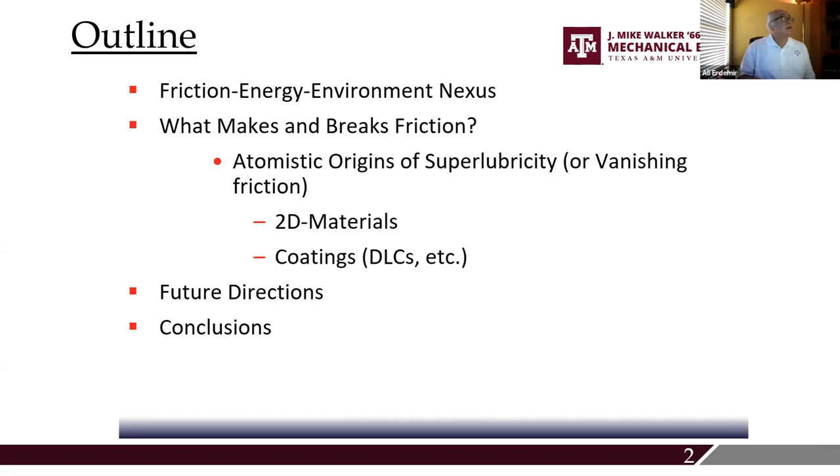So friction, as you all know, is known as resistance to sliding. And we feel it, actually, we live with friction every day. We hardly make a big deal about it, but it's part of our daily life. Despite being part of our life, it is one of the least understood physical phenomena.

We are doing all we can with all these computational capabilities to understand the root causes of friction at the atomistic level, and we are making progress. But have we actually fully understood it? I doubt so. So it's going to be with us for quite a while longer.

And it is very important for safety, safe walking. A few weeks ago, we had a big snowstorm here down in Texas, and it crippled life, and everything almost came to a halt, and it caused major damage. People fell down and actually fractured their legs. I have a friend at the university who actually had a major surgery because of a fractured hip. So it's due to friction, or lack of it.

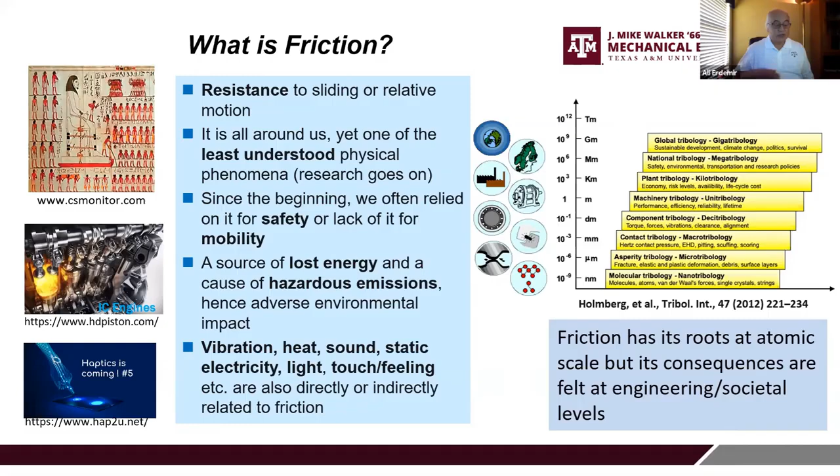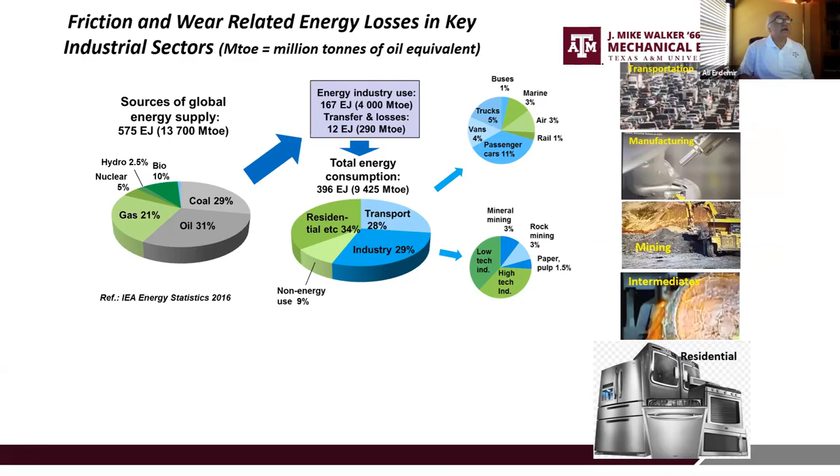If you go to the next slide, you will see that worldwide we produce a huge amount of energy. We need it for our industrial activities and modern lifestyle. There are so many of them. And in every one of these, there are a lot of moving parts, as you can imagine.

Some of these industrial activities shown down here show the fact that there are a lot of moving parts, and in every one of these, there are frictional interfaces where energy is dissipated.

With Professor Holmberg from VTT Finland, we tried to estimate how much energy is lost to friction in all these industrial activities. And it turns out that if you combine the portion that is due to wear and material loss, friction and wear almost consume a quarter of the global energy output. And this is quite incredible.

Collectively, these two events actually also produce 8 gigatons of CO2 emissions. I think currently total CO2 emissions are about 44 gigatons or so. So it's almost proportional - it's quite a huge amount of CO2.

And this has been actually going on for a very long time. This accumulates in the upper atmosphere, and then we create these greenhouse gas emissions. And then we have all these weather-related or environmental-related issues.

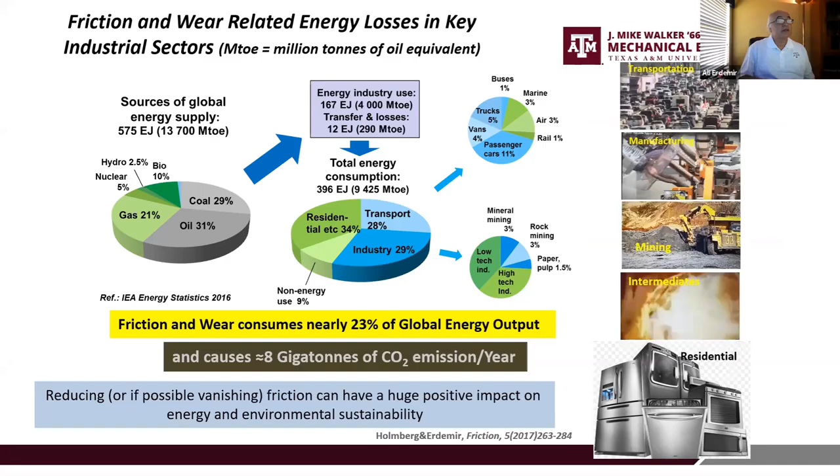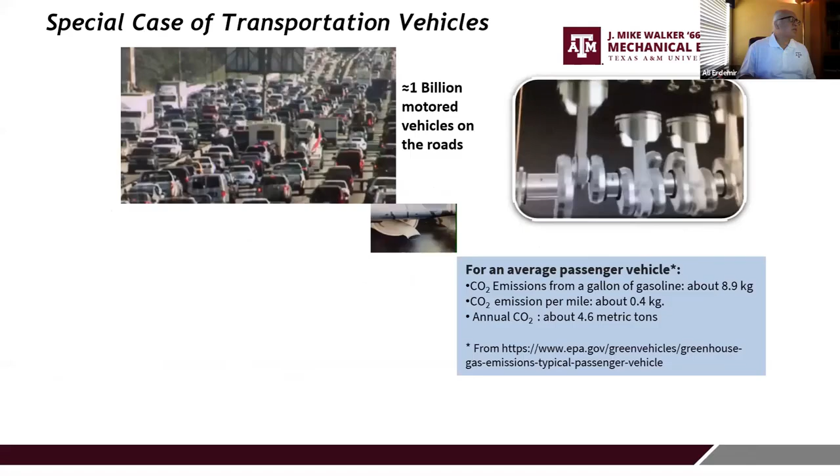There are a lot of good activities for clean energy resources, but these developments unfortunately are at a very slow pace. If we look briefly at the situation with transportation vehicles, especially in this country, we have almost 300 million of these moving on our roads. This way of transportation actually became extremely inefficient, very wasteful in terms of energy.

We did a very focused study with Professor Holmberg to see how much of the total energy that we put into the fuel in our gas tank is actually used to move the car. It turns out that if you take all the thermodynamic losses, air drag, and other things, the bottom line is that only about 20% of the total energy recovered from the fuel is used to move the car. This is really unsustainable.

This had to change. Of course, nowadays there's a huge interest in switching to electric vehicles, and these are coming very strongly. Hopefully by the middle of this century, half of the vehicles on the road will be powered by electric vehicles, and I think that's a great thing.

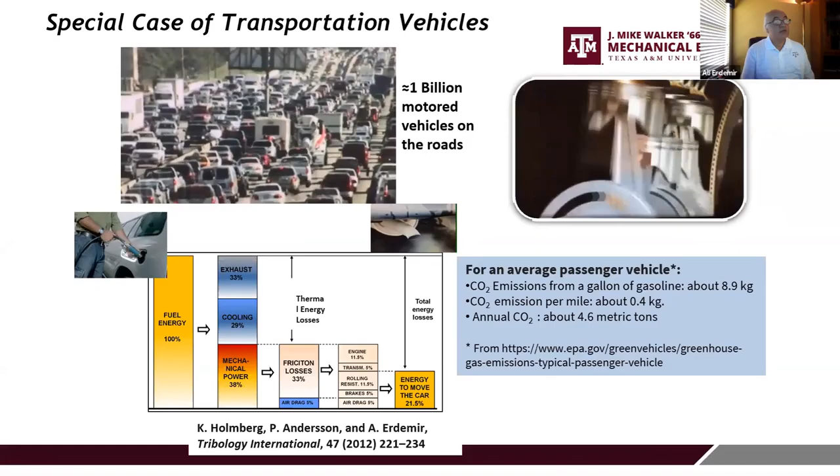In this country, every one of us, according to statistics from the EPA, drives a car, and we are culprits in terms of our carbon footprint. Every one of us produces almost 4.5 tons of CO2 annually. When you think that we have over 1 billion motor vehicles, these are quite unbelievably high numbers. In this country we have a huge number of transportation vehicles, and collectively they are blamed for 28% of greenhouse gas emissions in 2018.

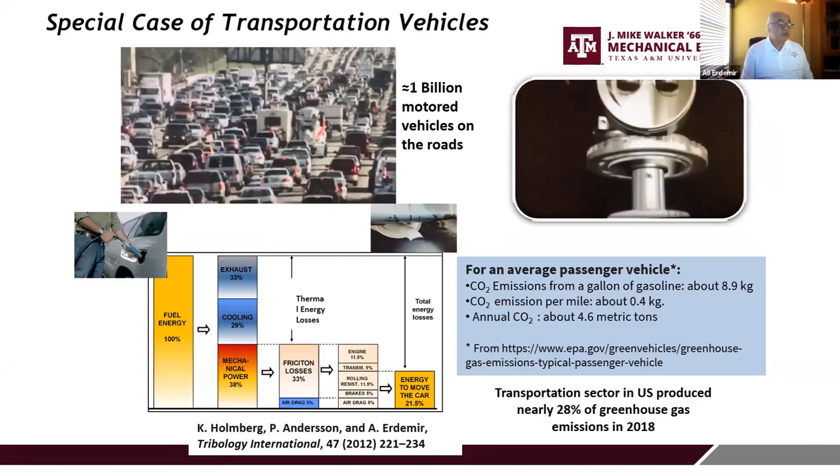As I was saying, these figures are not very good in terms of our future sustainability and future generations, and we have to do something about it.

In terms of their carbon footprint, it may not really be much different. If we still get the power from fossil fuel burning power plants, the situation won't change. The only change is that we are shifting that carbon footprint to another source, as opposed to the cars or vehicles that are currently the main source of these greenhouse gas emissions. It will be shifted to a coal-powered or natural gas-powered power plant. These are the kinds of things we have to be very mindful of.

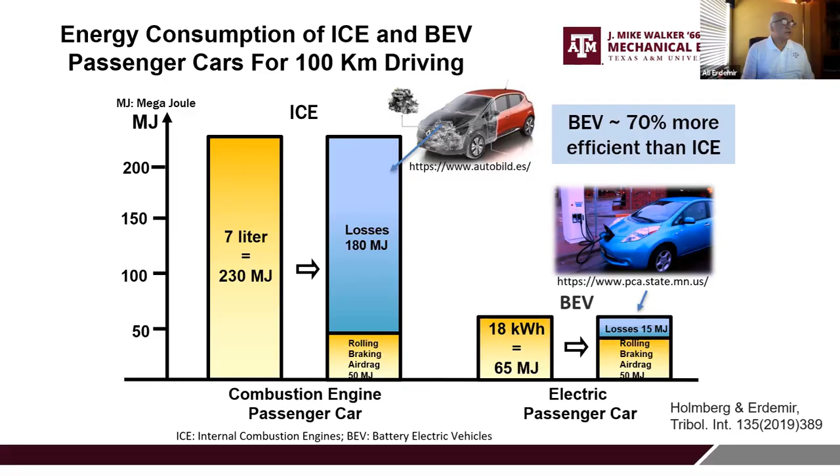So in general, if we can somehow switch to or develop technologies that will reduce friction or reduce frictional losses, that will have a huge impact on the environment, and also in terms of energy security and sustainability.

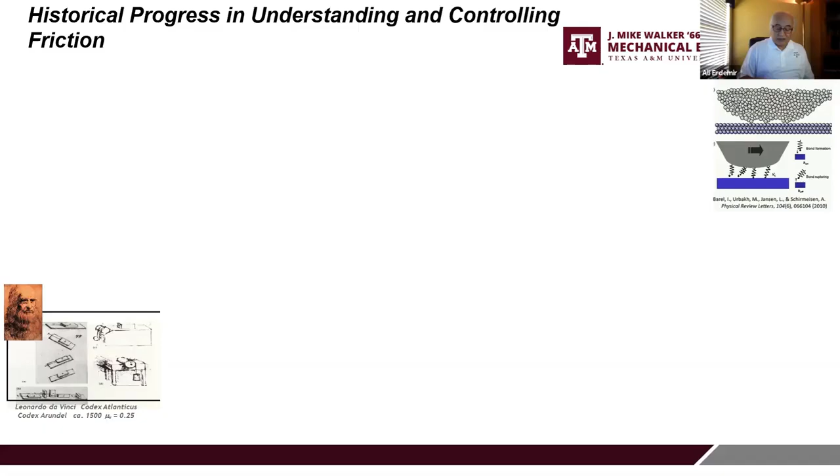Historically, if you look at how friction science and technology evolved over the years, we've come a very long way. The early scientific studies go back to the Middle Ages. Leonardo da Vinci was, of course, the master of these early studies, and he developed some very sound scientific principles that resonate even today. His experiments could be duplicated today, and you would practically get the same results.

But since then, we have made remarkable progress, especially in the beginning of last century, with atomic scale models from Tomlinson and Frenkel, and others who took that foundation further and came up with more realistic models in which the possibility of vanishing friction became possible. Hirano and Sokoloff were specifically two pioneers of these early studies, in which they developed commensurability versus incommensurability states of contact, which make a huge difference in the frictional properties of two contacting surfaces, as I will mention later on.

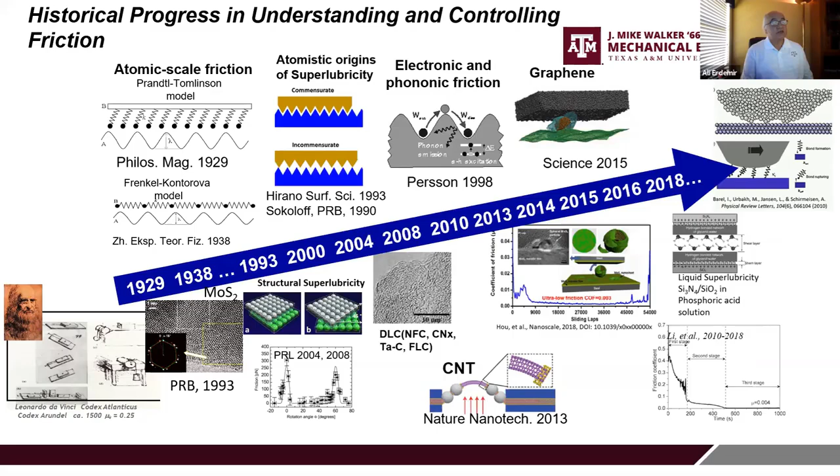Later on, we increased our knowledge further, looking at the electronic and phononic dissipation, or the sources of friction. Based on that understanding, we came up with the latest and greatest materials, especially 2D materials and surface modification technologies, which now make it possible to achieve superlubricity, or nearly zero friction, at the interfaces of some sliding surfaces. This summarizes the progress in superlubricity for solid sliding surfaces.

So it looks like we have really come a long way. We all know that if we rub steel against itself or aluminum against itself, we get very high friction. If we sprinkle some boron nitride or graphite or PTFE or MoS2, friction comes down quite substantially.

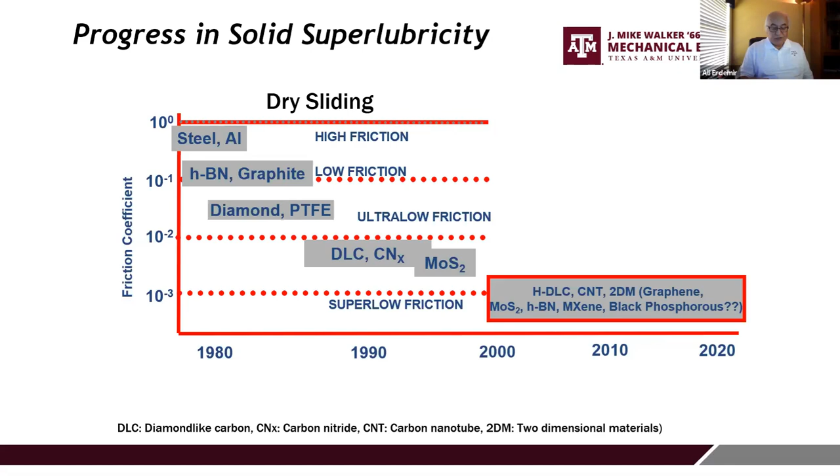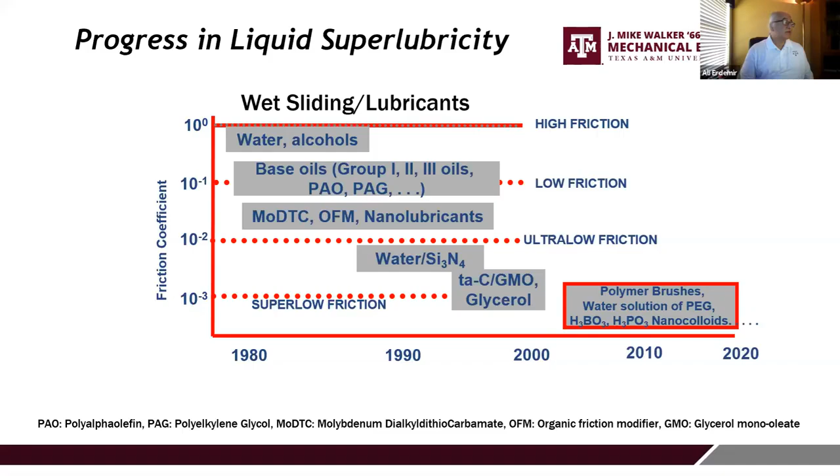And then we have all these other technologies related to polymer brushes, PEG, phosphoric acid, and some nanocolloidal systems, which, when present at sliding interfaces, can also provide extremely low friction coefficients.

So let's look at the case of 2D materials. These started toward the middle of the 2000s, with the discovery of graphene, which made a huge impact in so many ways. One of which, graphene was said to be one of the strongest materials, in fact 200 times stronger than steel. And it turns out it has other properties that have a huge positive impact on its tribological properties.

We were one of the very first to start rubbing and scrubbing graphene, and we published several papers showing that even one monolayer of graphene would provide very long wear life despite very high contact pressure. There was also the possibility of further functionalizing graphene to achieve nearly zero friction.

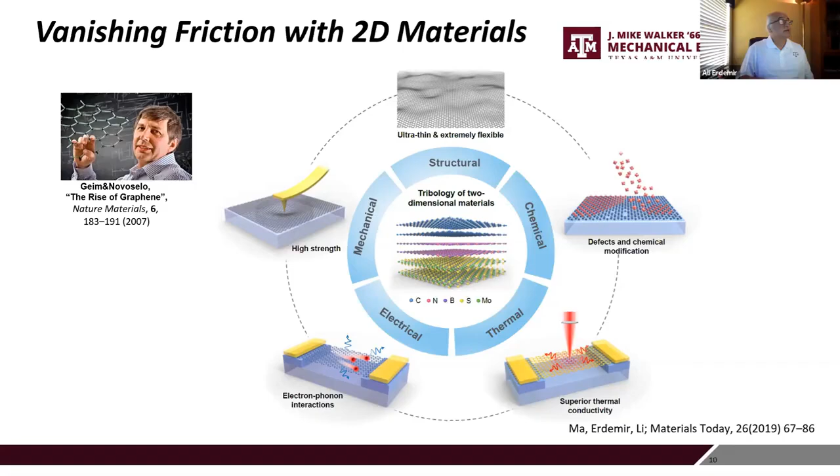We were not the only ones to get these kinds of results. Several other laboratories started working on these things, and under the right conditions, these surfaces could provide extremely low friction coefficients. One of these conditions relates to the commensurate, non-commensurate, or incommensurate state of contact.

In the case of commensurate contact, you have two surfaces, made of the same or similar or dissimilar material, whose atoms on the surface are in full registry. Because of this full registry, you have strong atomic-scale interactions, and thereby what they call atomic locking, which produces huge interfacial adhesion that makes these surfaces move with great difficulty.

In the case of incommensurate state of contact, if these surface atoms are twisted and brought out of full registry, you have a state of incommensurability. This produces weak interatomic potential, and the energy loss and gain between these atoms cancels one another, so in this case you have nearly zero friction.

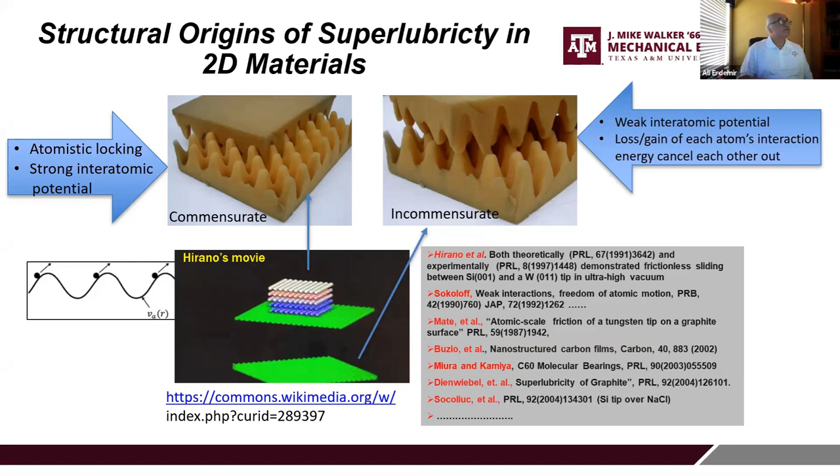One of the earliest verifications of this was from a group of scientists from Netherlands—Dienwiebel and his colleagues—who were able to test this model to see if one can achieve zero friction. They used a nanoscale tribometer, attached a layer of graphite or graphene to the surface of the tip, and rubbed this against another highly oriented pyrolytic graphite at the bottom.

By twisting these two pieces of graphite relative to each other, they were able to see a situation with very huge stick-slip or adhesive interaction. By twisting it slowly, they showed that after reaching a certain twist angle, friction would nearly vanish. This was a very interesting demonstration that commensurate or incommensurate states of contact are very important for superlubricity and having very high friction or no friction at all.

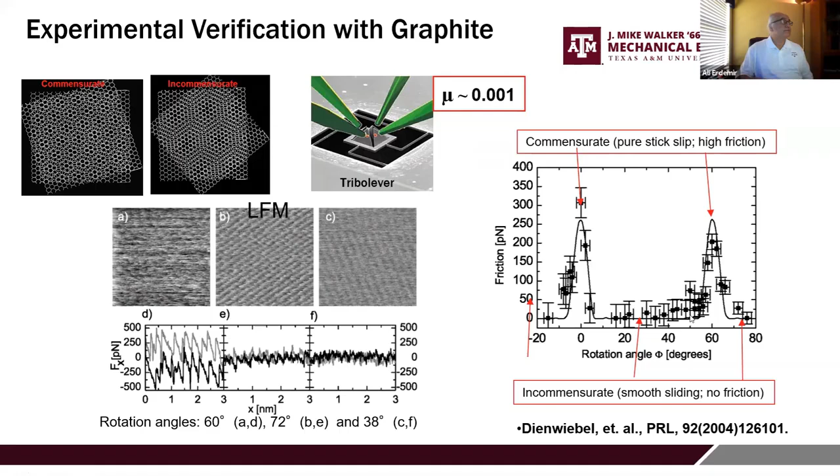This effect was not limited to very conformal surfaces. It could also be achieved with graphene applied to a microsphere and rubbed against either graphene or graphite. You can see the difference in this article: silicon dioxide microsphere against highly pyrolytic graphite shows that with increasing load, you also get very high frictional force.

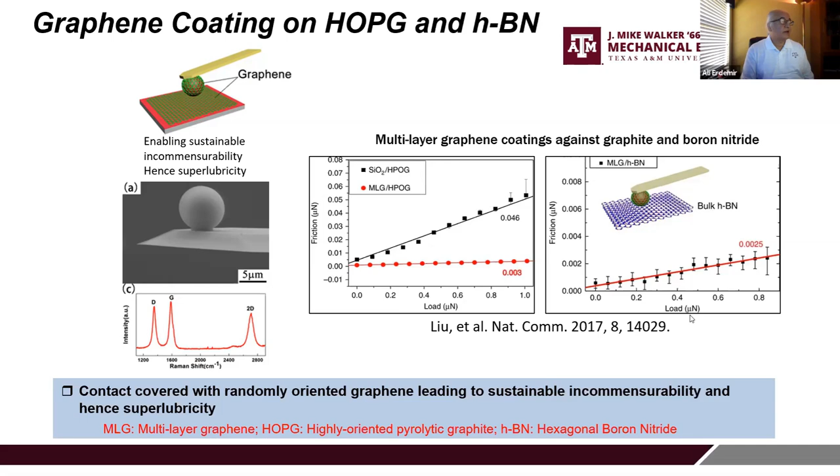But if you have graphene coating on the microsphere, rubbing against the same kind of graphite surface, the friction almost vanishes. Doing the same experiments against hexagonal boron nitride also showed extremely low friction. These microspheres favor incommensurability, so you have only a few direct atom-to-atom registry or commensurate states, and thereby this favorable incommensurate state of contact results in extremely low friction coefficient.

We have done a lot of studies in this area, with Diana Berman, now at the University of North Texas, and my colleague Ani Sumant, still at Argonne. We have seen extreme wear resistance of graphene, and these graphenes could be produced using the CVD method.

Even one layer of graphene under reasonably high contact pressure could achieve over 6,000 sliding cycles of lifetime. If you build a few additional layers, that wear life would go all the way up to almost 50,000 cycles, which was quite remarkable.

Of course, these had to be done in a special environment—in this case, a hydrogen environment. Hydrogen seems to make the broken surfaces of graphene, under sliding contact, eventually wear through or fracture the graphene cage. But these broken edges are stabilized or neutralized by hydrogen, so they don't further disintegrate or participate in this stick-slip behavior that triggers not only very high friction, but also high wear.

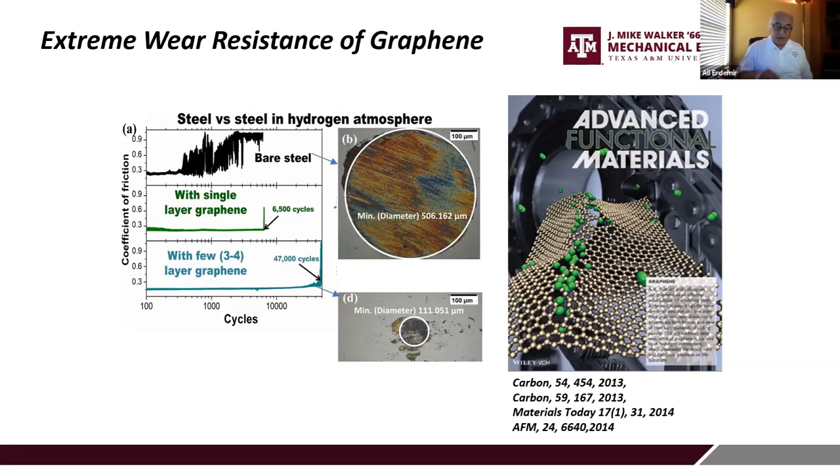In further studies, we have also seen that one can achieve superlubricity with graphene. These were discrete flakes of graphene sprinkled on a surface, combined with nanodiamond particles, typically 3 to 5 nanometers, rubbed against a DLC-coated ball. So we had carbon material in different forms—solid carbon on the ball side, plus graphene and nanodiamond. These combined carbon structures were able to bring the friction coefficient down to the 0.004 level.

When we did very high resolution transmission electron microscopy of these surfaces, we noticed scroll-like formations with diamond nanoparticles right in the center. This gave us the impression that these nanoflakes had been attaching to the surface of the nanodiamond, which makes perfect sense—both the edges and the surface of the nanodiamond have dangling bonds, or covalent bonding possibilities. Once that happens, the rest of the graphene would just scroll to form these rolls.

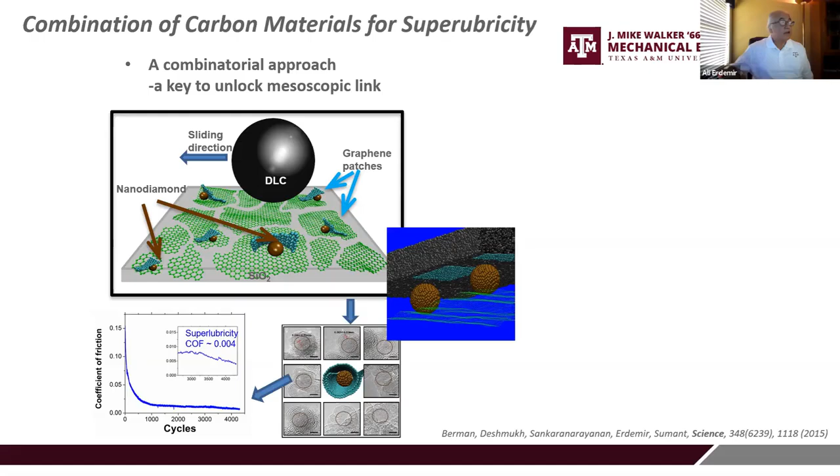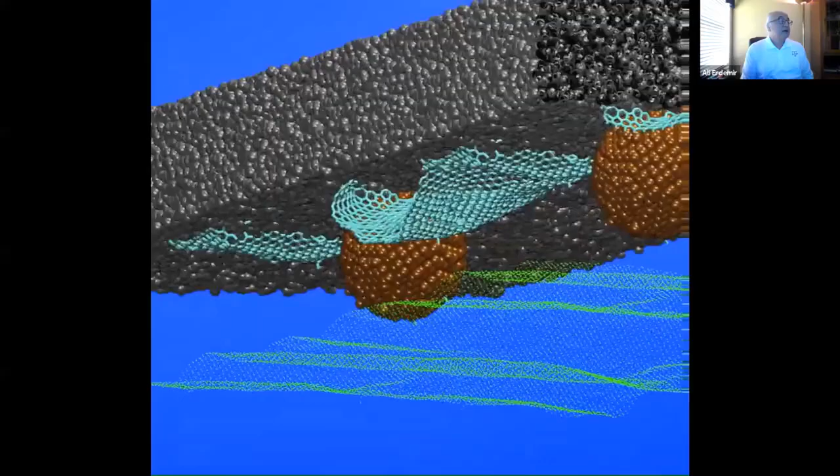This was also simulated using reactive MD simulation methods that show exactly how these nanoscrolls form. Once the nanoscroll forms, the severity of the nanodiamond as an abrasive and adhesive particle is diminished, so it becomes more benign, and it can also roll, in addition to having this surface-to-surface interaction—what we call an incommensurate state of contact.

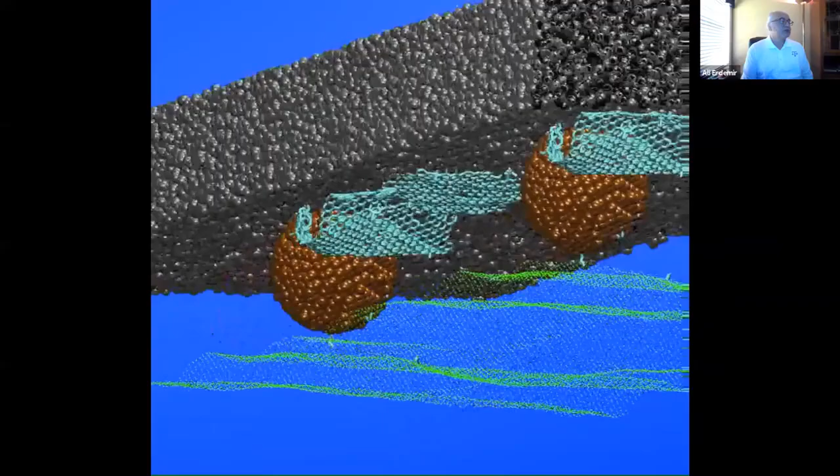There have been many other studies that attest to the importance of structural superlubricity in one form or another. Graphene has been studied quite extensively, and other colleagues have looked at MoS2 and other 2D materials, and so on. It was also found that even in nanotubes, a similar effect could be achieved by twisting the inner and outer shells of the tube, bringing them to non-commensurate states of contact.

There have been some other exciting developments quite recently, one relating to MXene, another 2D material, still emerging. There seems to be a lot of potential for industrial applications in the near future. These can be functionalized by polar molecules or additives and added to a lubricant, and in that case too, you can achieve extremely low friction coefficient. This sounds very exciting in terms of large-scale industrial applications in the near future.

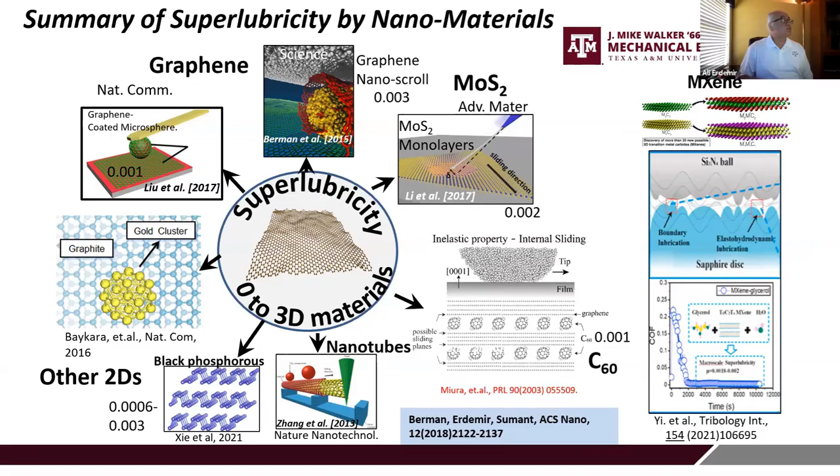Another class of material that shows superlubricity is diamond-like carbon. Diamond-like carbons actually come in different forms, and by and large they are amorphous in nature.

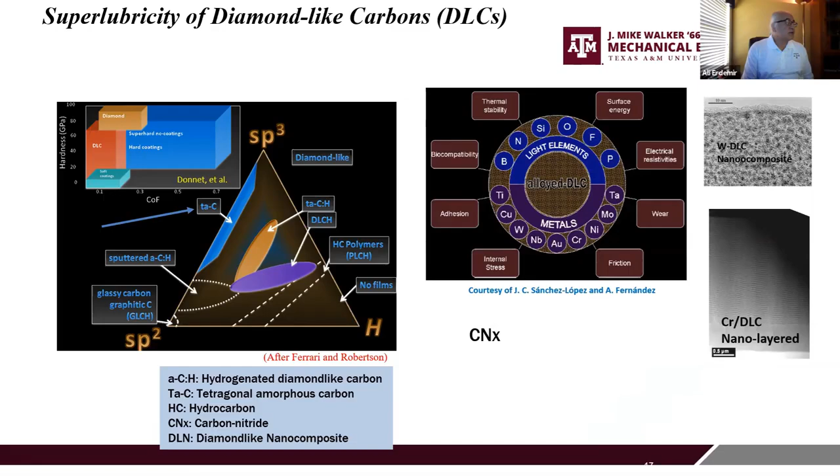Depending on structure and chemical state, they could have, as shown in this diagram, no hydrogen and mostly sp3 bonded carbon, or hydrogen incorporated into the structure. So they come in all kinds of chemistries and structural order. You can have diamond-like carbon with extremely sp3 bonded character, almost similar to diamond in terms of friction and wear properties. Or you can have mostly sp2 bonded carbon, which will be similar to graphite.

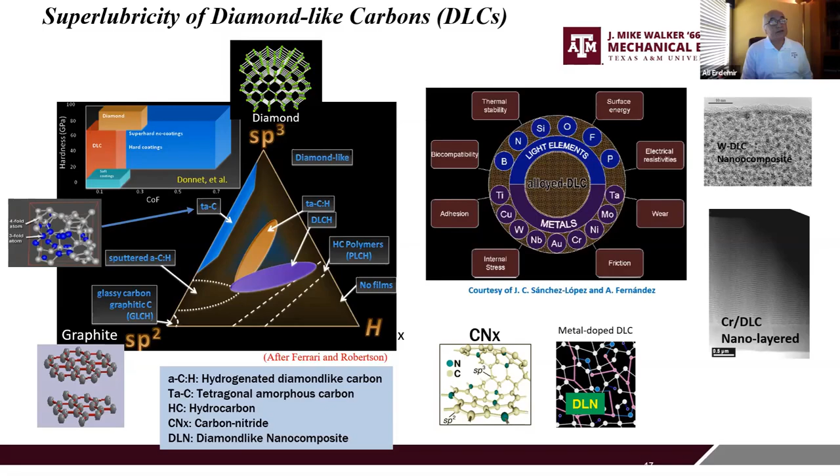You can add hydrogen, and these are mostly produced in a hydrogen-containing plasma environment where hydrogen incorporates into the structure, giving hydrogenated carbon variations. You can also dope other metals and elements into these DLCs to achieve other physical and mechanical properties. CNx is a very important DLC film, and metal-doped DLCs are also important industrially. Tungsten DLC (WC DLC) is widely used in industrial applications, and you can also build these DLCs at nano-layer architectures.

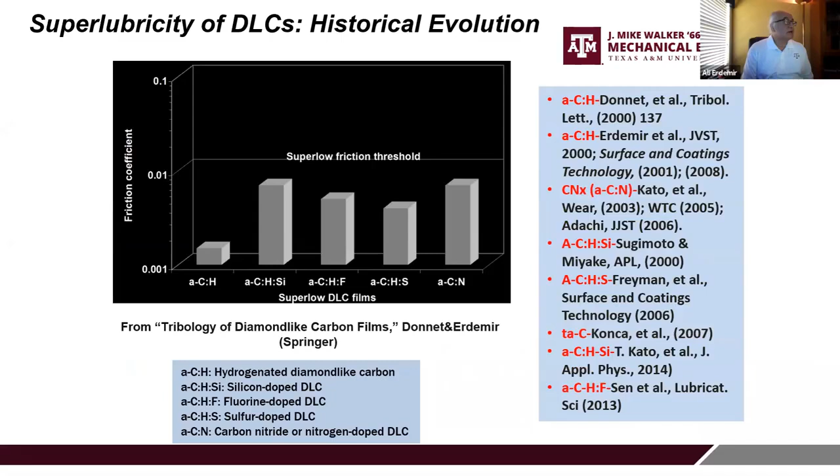From a superlubricity point of view, there have been many studies showing that with different types of alloying or doping, you can achieve superlubricity, or friction coefficients less than 0.01.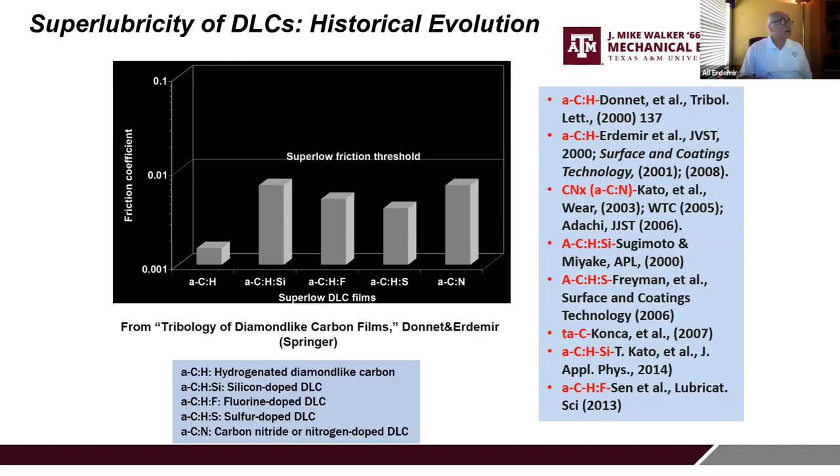In our studies, we concentrated mostly on amorphous hydrogenated carbon, shown on the left side of this diagram. Other colleagues looked at CNX, silicon-doped DLCs, fluorinated DLCs, and even sulfur could be incorporated. In most of these cases, when friction studies were done, the friction turned out to be extremely low.

We started our studies toward the end of the 80s, and published one of the very first papers on DLC back in 1990. What we did was find a very unique correlation between the amount of hydrogen we put into the DLC versus its friction coefficient.

We further optimized this to achieve a unique chemical composition resulting from 25% methane and 75% hydrogen in the plasma environment. The DLC film grown in this kind of plasma environment gave a friction coefficient down to the 0.001 level. This was quite remarkable.

We could actually measure this one test after another. Not only that, but we shared these films with colleagues from other laboratories to see if they could duplicate our results, and they all did. This was quite remarkable.

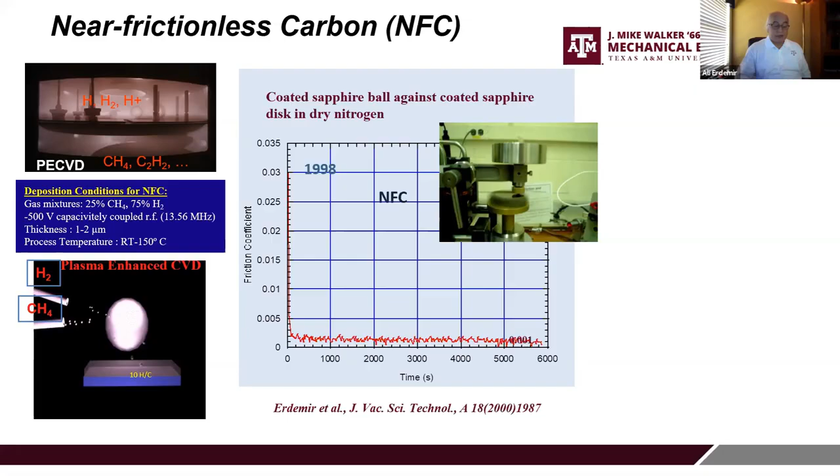If you look at this from a high school chemistry level, when hydrogen loses its single electron to carbon, the nucleus becomes positively charged. So when you bring these two surfaces together, it feels like pressing two positively charged surfaces against one another, which triggers repulsive forces. Otherwise, these surfaces would develop adhesive forces, which would trigger high friction. Here, instead, you're triggering high repulsive forces.

We did collaborative studies with several colleagues who looked into this using ab initio calculations and DFT, among other methods. In one case, they used diamond as a model system since it's easy to simulate.

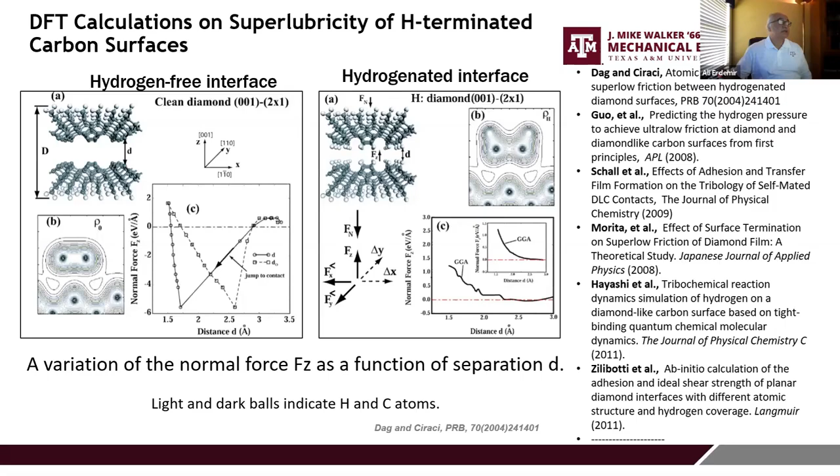So this kind of corroborated as to what made these highly hydrogenated carbon surfaces super lubricious, providing nearly frictionless sliding conditions. And of course, we did TOF-SIMS analysis of these surfaces after the test. The only thing we could see within the sliding wear track was carbon and hydrogen, as shown in these 3D TOF-SIMS maps.

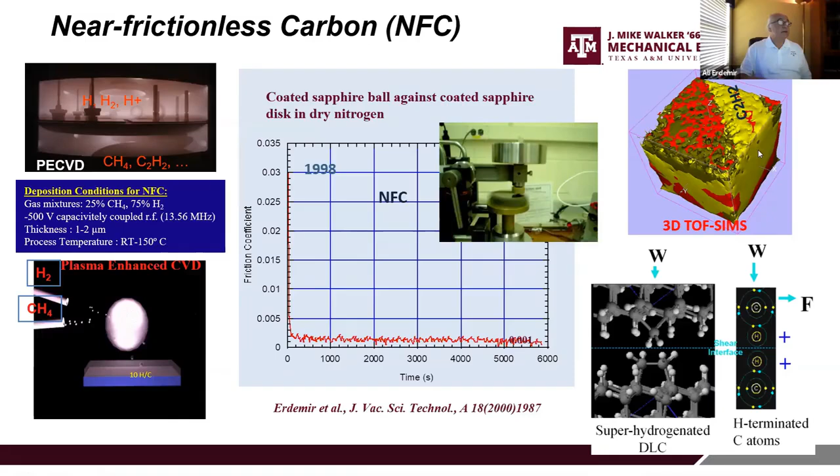So to further prove our point, we started with a hydrogen-free DLC. Actually, these are the kind of DLCs you can directly sputter out of a carbon target in the absence of hydrogen. These are mostly sp2 or sp3 bonded carbon, but on the surface you may have some adsorbed species, and that's about it.

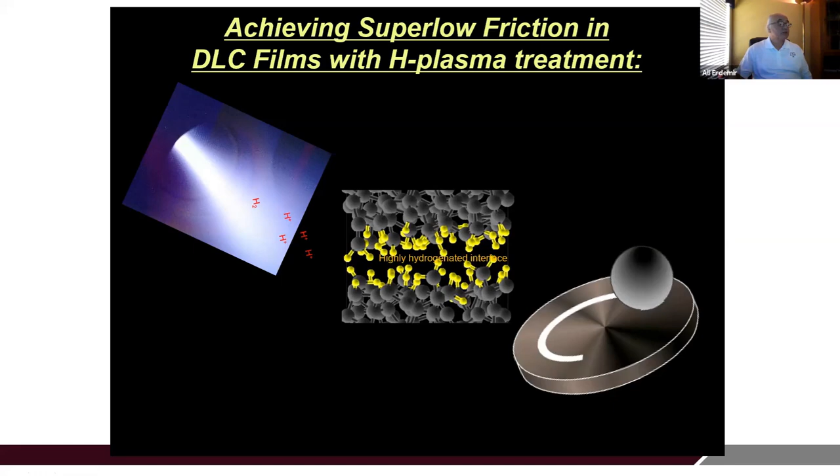Using an ion bombardment technique with ionized hydrogen atoms, we bombarded these hydrogen-free carbon surfaces. We felt that if we could do this, these artificially hydrogenated carbon surfaces should also give superlubricity. So we did the experiment, and it was no surprise that the hydrogen-free or non-hydrogenated surface would fail after about 5 to 10 meters, with very high friction, typically going all the way up to

0.85 and higher. But after the surface was fully hydrogenated through this hydrogen treatment or bombardment, it started giving this extremely low friction coefficient, as shown in the blue curve. In fact, we could measure the friction coefficient down to 0.005. So the hydrogen termination of these carbon surfaces or DLCs turned out to be a very important mechanism to achieve superlubricity.

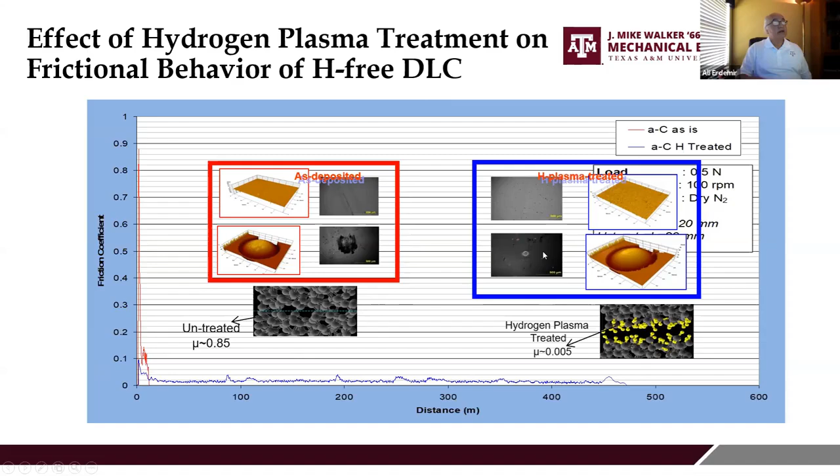And of course, this also reflected very well on the wear of these materials. In the case of non-hydrogenated surfaces, the DLC film was worn out very quickly. In the other case, the plasma hydrogen-treated surface, you could hardly see where the sliding had taken place. So extremely low friction coefficient also resulted in almost zero wear.

Similar things could be achieved with these highly polar oil additives. One is oleic acid, a highly polar molecule. If you put it with a base oil on the surface of the DLC, either hydrogenated or hydrogen-free, these molecules tend to attach to the surface. With that attachment, the surface again terminates with something more benign and less chemically active, and with that you could achieve extremely low friction coefficient, as shown in the red curve at the bottom.

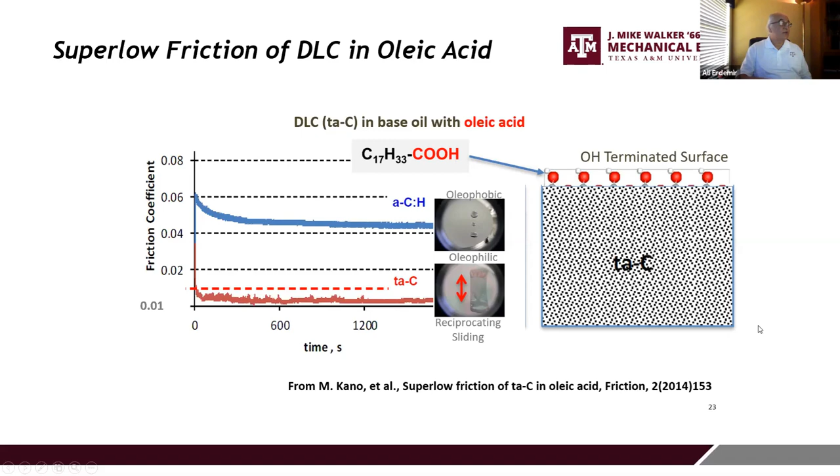So in the case of DLC, it looked as if superlubricity has a lot to do with the hydrogen termination of the top sliding surfaces. You can also terminate these surfaces with OH or oxygen, which aren't shown here, but we also ran tests in pure hydroxyl or pure oxygen. The friction coefficient would be low, but not as low as with hydrogen, mainly because even these oxygen or hydroxyl terminated surfaces would have some polar activity and attraction, giving higher friction.

If there's no hydrogen at the sliding contact interfaces, this will be very typical of tetrahedral amorphous carbon produced from a carbon target via laser, pulsed laser deposition, arc PVD, or sputtering methods. Those surfaces will give you very high friction, mainly because of these pi and sigma bond or covalent bond interactions.

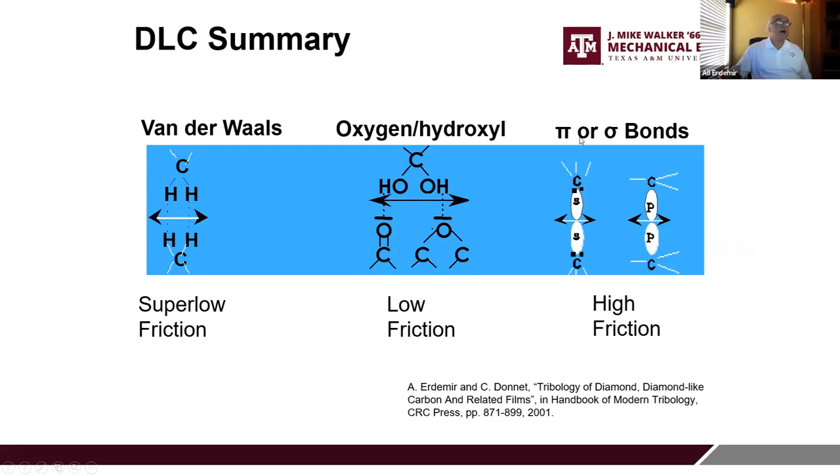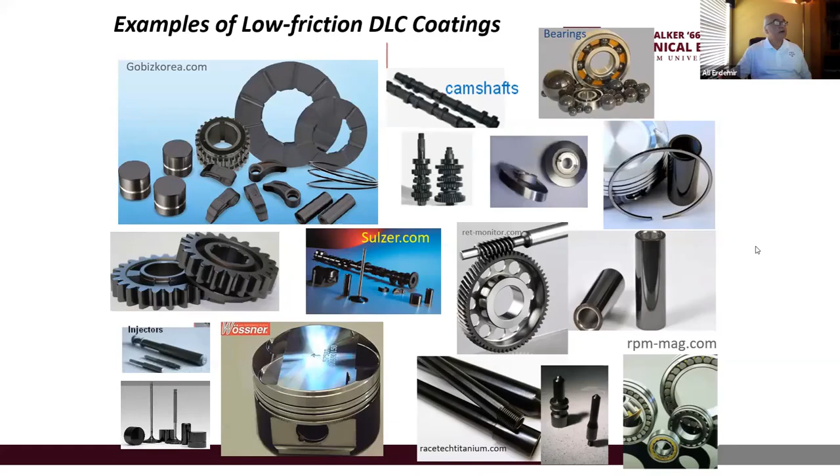So DLCs actually made a huge industrial impact. They are used in all kinds of industrial applications. Some of these are summarized here, and quite recently we published a book looking into all these latest coating technologies for vehicle applications with a friend from Hyundai.

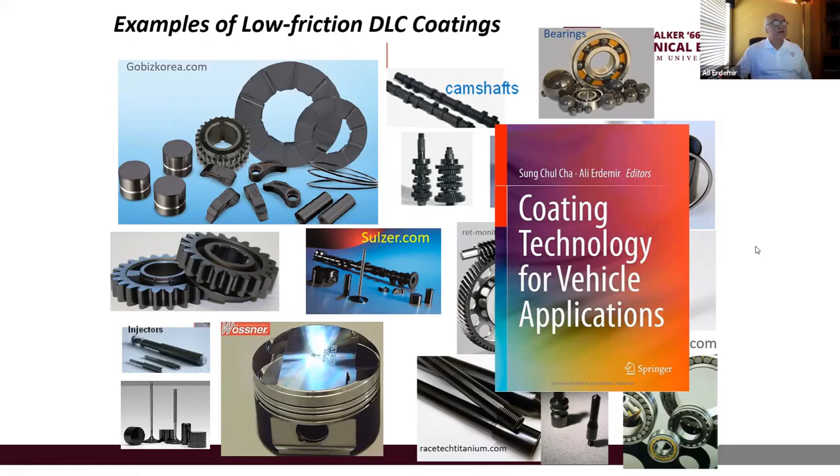So in terms of overall progress toward achieving macro scale superlubricity and its application, from these very early ages where the Egyptians struggled to move these huge colossi with hundreds of slaves, we have come a long way. We have done quite remarkably well in terms of understanding the origins of friction.

And with that understanding, we have developed new methodologies, new technologies, and new materials that provide extremely low friction coefficients. We are still working very hard. In fact, studies related to superlubricity have quite recently skyrocketed. I think in a given year, we now have hundreds of papers published on the subject.

With all these developments, I'm very hopeful that in the future, given another maybe 10 or 20 years, we might actually see real tribological systems utilizing some of these technologies, achieving near zero friction and consuming very little energy. Especially if we can figure out future electric vehicles consuming very little energy due to frictional dissipation, with that energy coming from the sun or wind. These vehicles will be totally green, and that will make a huge impact on the sustainability of our planet.

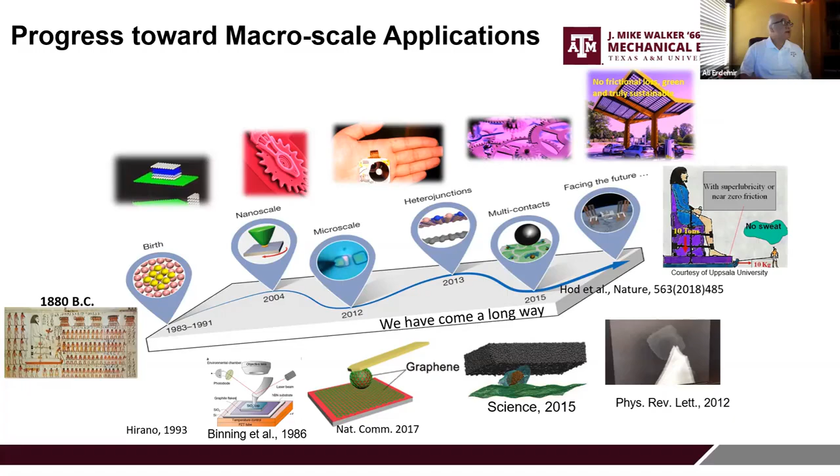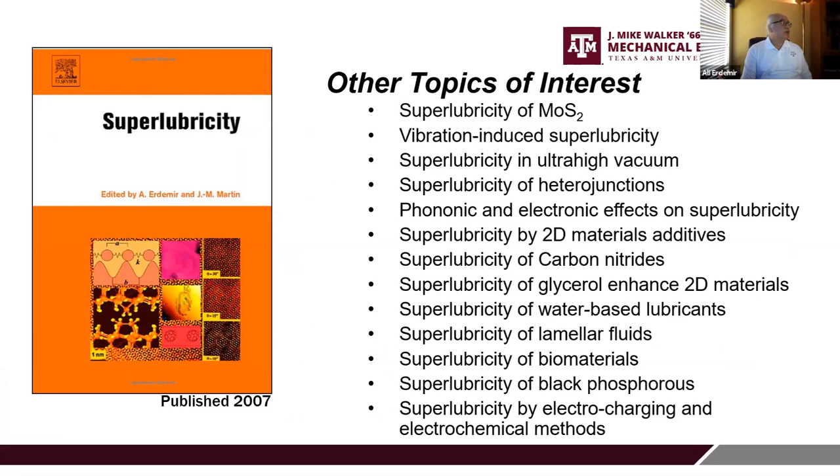So we have been very active in this area. We published a book back in 2007 on superlubricity, and since then we actually updated it, and this has been published a few months back. That contains a lot of new material which I could not cover, but these are some of the topics that are very extensively covered in this new book that might be of interest to those interested in this topic.

So in summary, I think we have made great progress in the design of new and more exciting materials and coatings that can provide very low friction and wear. Especially these 2D materials have made a huge impact in terms of vanishing friction. DLC has been around, but there is still a lot of work going on in this area, and I think there might be some additional new highlights or discoveries related to superlubricity and broader application possibilities.

In the case of 2D materials or crystalline materials, it looks like superlubricity is pretty much dependent on the incommensurability or the scroll formation mechanism that I mentioned, which we discovered at Argonne National Laboratory. These are mostly for the 2D materials. For non-2D amorphous materials like DLC, I think surface termination or the surface termination state of the material, especially with a gas or molecule like hydrogen, seems to be extremely important.

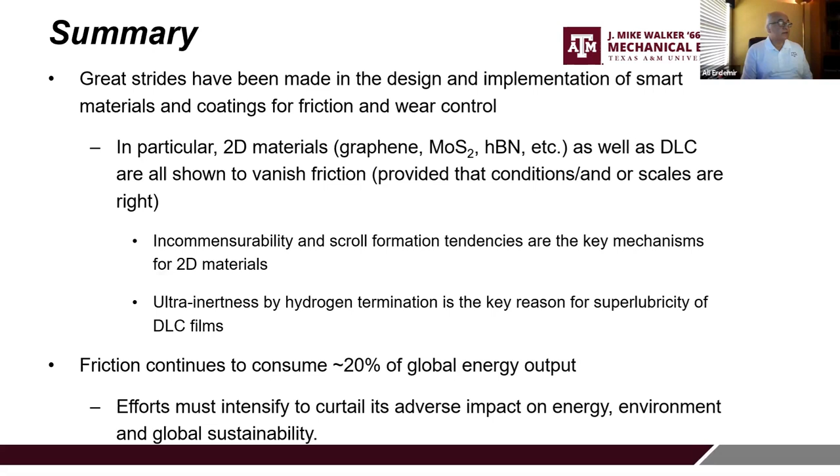So with that, I thank you all, and I have had the great pleasure of working with a lot of great people. I must particularly acknowledge Professor Holmberg. We had multiple papers that relate to friction, wear, and their impact on energy, environment, and sustainability. And of course, much of my work at Argonne has been funded by the U.S. Department of Energy. I'm very grateful for their generous support. And also I had one of the very best scientists in my team inspire me and help me realize all these great studies that we have published in multiple papers. And also I had a lot of international collaborators who helped me with my work all along.

So with that, thank you very much. And if there are questions, I'll be more than happy to answer.